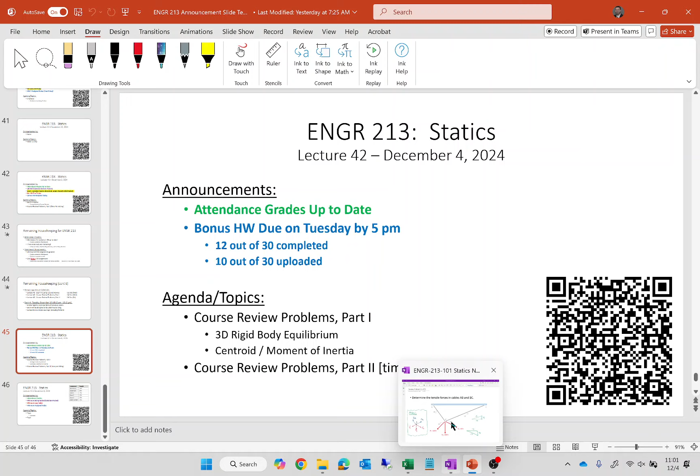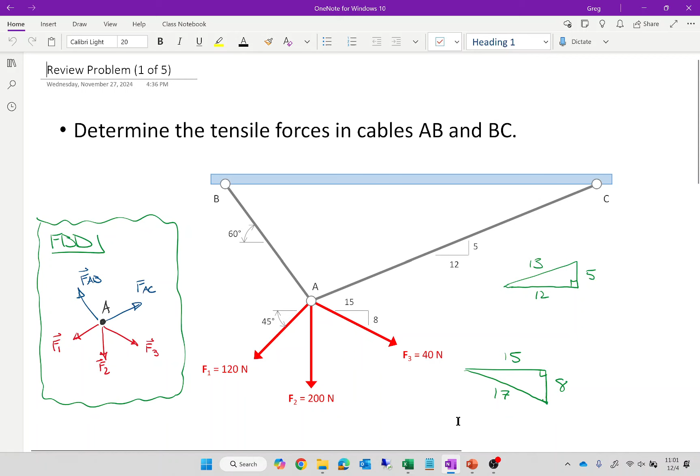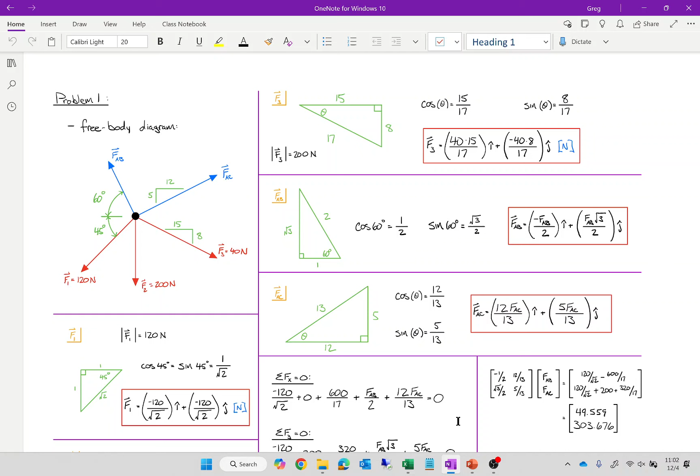So the one other thing I wanted to mention is that this example that we did last time, if you check the class notebook, I did upload the solution because, again, my computer was being a little weird last time, so I just uploaded that here. I won't go too far into that, but everything that we put on the board last time is available there. Okay. Everybody ready to get to it? Let's get to it.

So this is problem number 2. I've got 2 problems in this review that I just had a lot of fun putting together. This is one of them. So I have a 100 kilogram plate that is being subjected to a 300 Newton force right here and a 200 Newton meter edge moment applied on this far edge over here. And I would basically like to get the reactions. So I've got a reaction here, I've got 3 reactions here, and a tensile force in this cable.

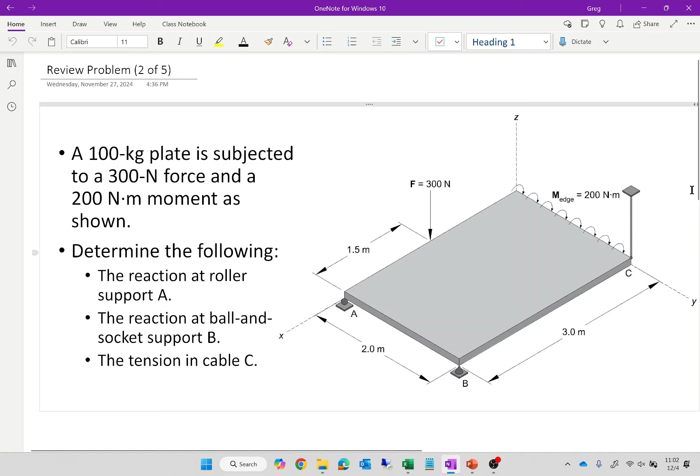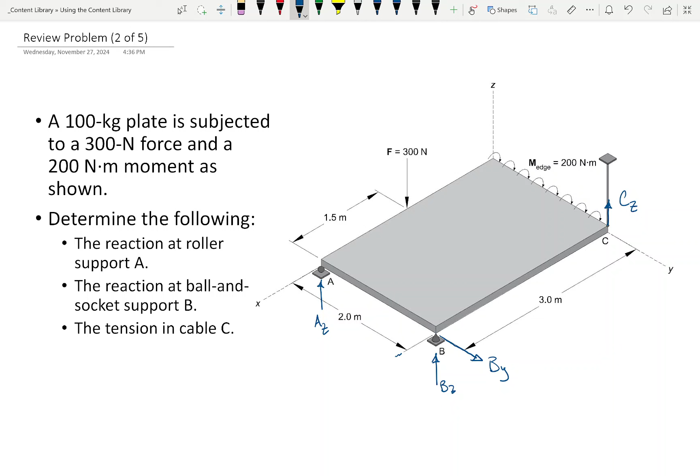Okay, so we talked about that part last time. Let's draw that out. Okay, so I'm going to have some tensile force here, which I'm going to call CZ. I'm calling it CZ because it's along the Z-axis. I'm going to have some reaction here, which I'll call AZ, and I'm going to have potentially 3 reactions here. I can do better than that. I'm going to scroll up a bit, make that a little easier. And I'm going to have a reaction right there, BX, BY, BZ.

As for the directions of these reactions, notice that BX is along the x-axis, BY along the y, BZ along the z. I put them along the positive direction for each of these axes, okay? So I'm assuming that they're along the positive direction. So if BX were to be negative, it would just be going the other way, okay?

Now, there are 3 reactions, A, B, and C. There are an additional 2 forces being applied to the system. So the 2 forces are F, the 300 Newton force, but what's the other force being applied to the system? And I'm not talking about this edge moment because that's not a force, that's a moment. What's the other force being applied to this system? The weight, exactly right. So the weight is going to be, I don't know, right there. Right?

And how much force is that, by the way? That's a trick question because the answer is not 100. It is 100 times 9.81, right? Because that gives me 981 newtons. Does that sound good?

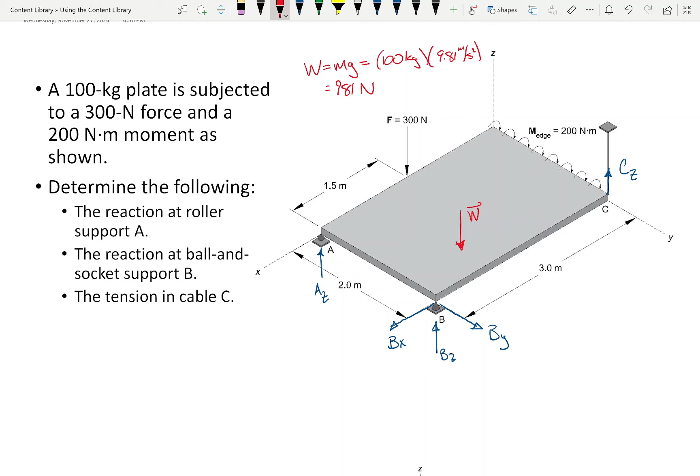Now, I am not saying that we are going to ignore this edge moment. Far from it. But it is not a force. It's a moment. Okay? So, I would like to list, let me do this.

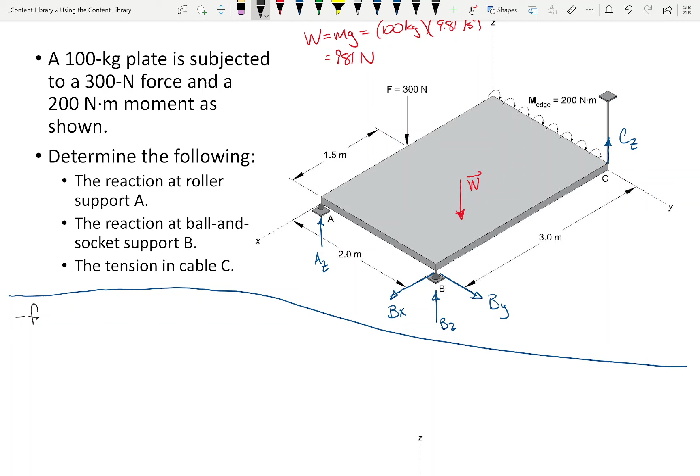Let's list all our force vectors. And by the way, I put a copy of the system down here. I'm going to drag that down a bit. Let's list all our force vectors, right? So we have force vector A, which is AZ times K.

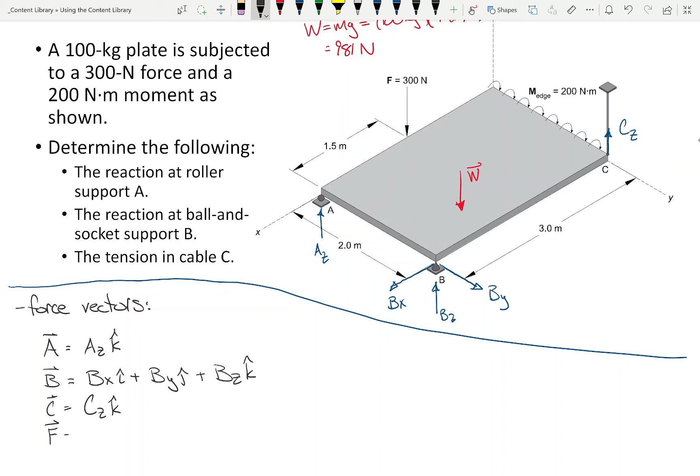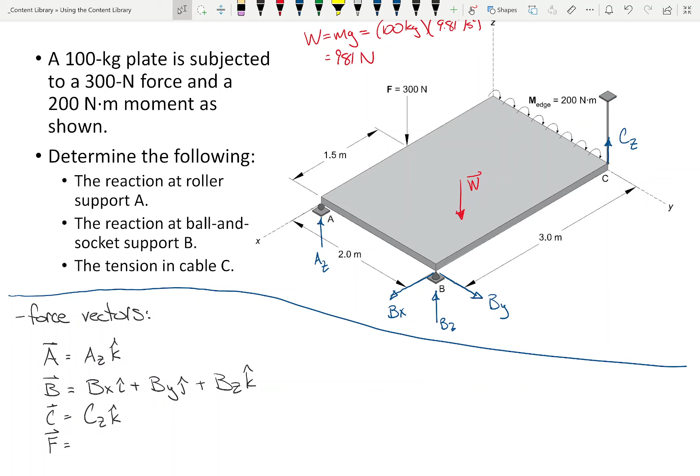Force vector B, force vector C, which is right here. What about force vector F? How are you going to describe force vector F? Somebody tell me, how are we going to describe that in IJK notation? Negative 300K. It's K because it's along the Z-axis, and it's negative because it's going down. 100% right.

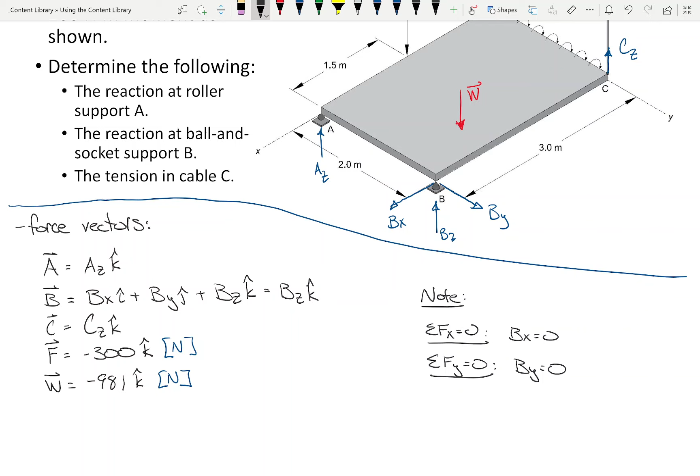So note, so I'm going to say that's all we got to deal with, okay? And I'll just say note, would you like me to give you a two-dimensional analogy to what I just did? Let me give you a two-dimensional analogy. Here, I'll put it right here.

Let's say I have a beam with like a point load and a distributed load. How many reactions are here at the roller? How many reactions are here at the pin support? A vertical and a horizontal, right? But what is the horizontal reaction for this problem? Because there's nothing horizontal, right? That's the same thing that happened here, just in 3 dimensions. There were no applied forces in the x direction, no applied forces in the y direction.

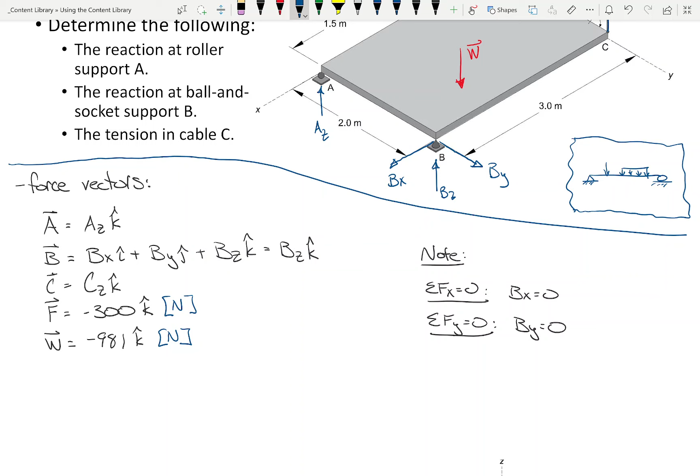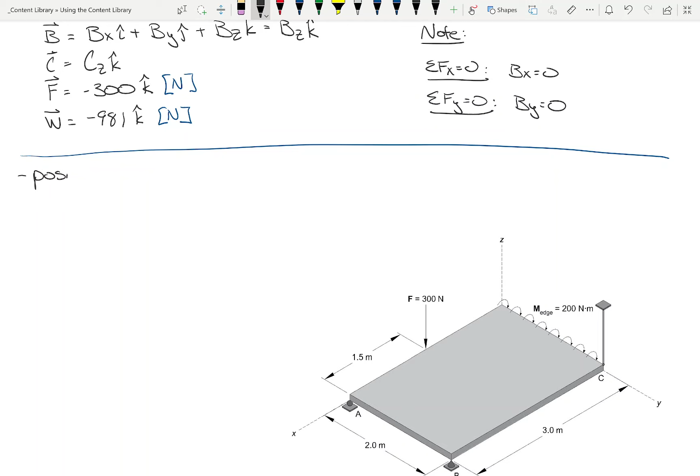So yeah, there are forces there. I'm just showing that that force has a magnitude of 0. Does that make sense? Everybody okay with that? Okay. I just wanted that to be said, okay? We're still going to sum moments about B, okay? So, okay. So now what I want to do is I want to look at position vectors and I want to look at moments.

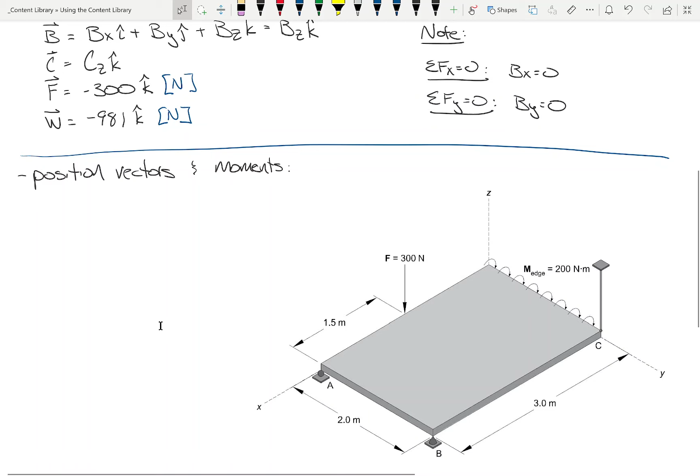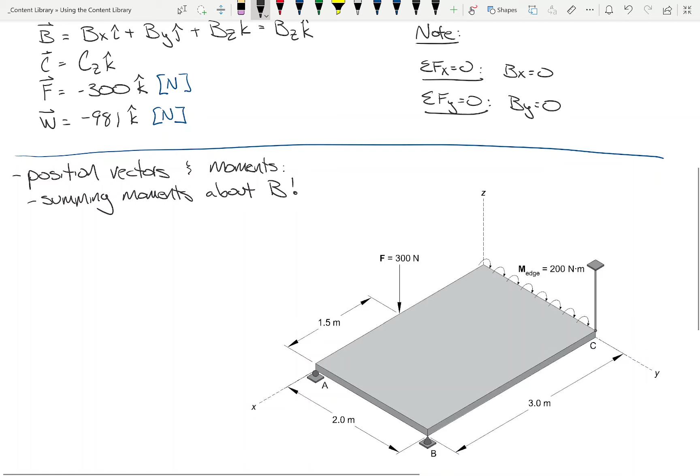Okay? So this is our problem, and we're going to sum moments about point B, just like we said we were. Okay, so we're summing moments about point B. So let's deal with each of the forces. So let's start off with A. So vector A is going to look like that, right?

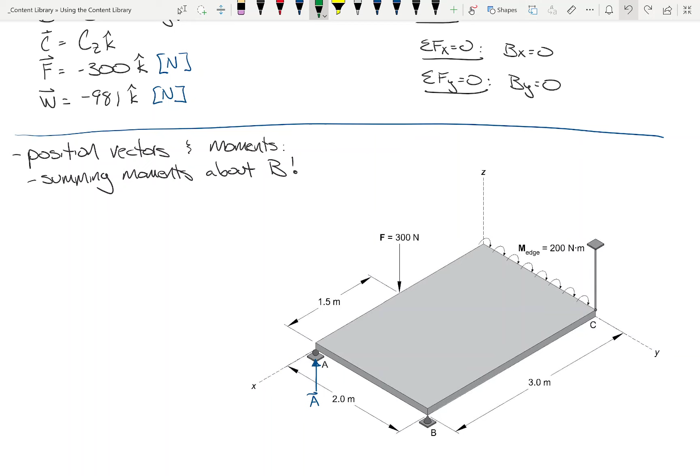So if I'm drawing my R vector, how do we do R vectors? R goes from the point of interest to the line of action of the force. So the R vector for this one essentially is that, right? Oh, let me use a different color. That's the R vector, right? Just from here to here. And so we'll call this R vector to A from B, right? So help me out.

What is R to A from B? How do we get to A from B? How do we do that? 2 meters in the y direction. Is it positive or negative? Negative. Because this is positive y. So the R vector is negative 2j, right? Does that make sense? To get from here to here, we don't go any in the x, any in the z, we just go y, and it's minus 2j.

Okay? Sound good? And the reason that we're doing that, I'll put this here on the board, is because we're going to need to do a cross product like that to get the moment, right? Make sense? Okay?

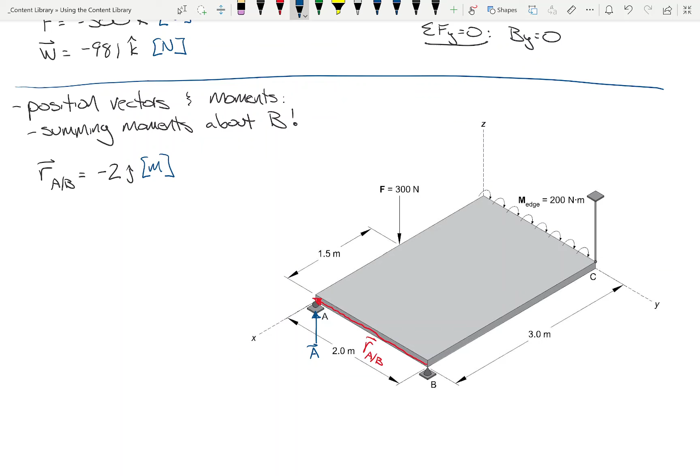Now, there is a force right here, right? But do we need to write an R vector for it? No, because we're summing moments about that point. So what we would essentially be saying is that the moment from that reaction is going to equal that reaction, but it's going to be crossed with 0, right? And a vector crossed with 0 isn't going to be anything, right? Does that make sense? So we're not going to have to worry about that.

So what about C? Okay, so we've got a C like that, and so the R vector is like that. So R to C from B. What is R to C from point B? How am I going to describe this vector? Negative 3I, right? Because it's negative 3 along the x-axis.

Okay, and we're doing that because we're going to have to do that. So basically what I'm doing here is I'm writing a list of all the moments that we're going to have to compute. Okay? Does that make sense? All right. Am I going to need any more R vectors? How many more am I going to need? 2. Because I'm going to need an R vector here.

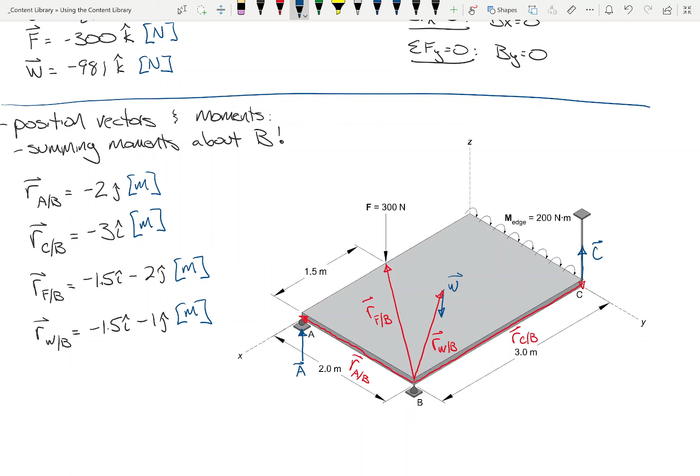So, and again, what we're going to have is MF, MW. Okay. Does that make sense? So, all right, here's my point. Okay, so there's the R vectors. Let's see if we can write down our moments. So let me write down what I've got here on the board so far. And I'm going to skip the B.

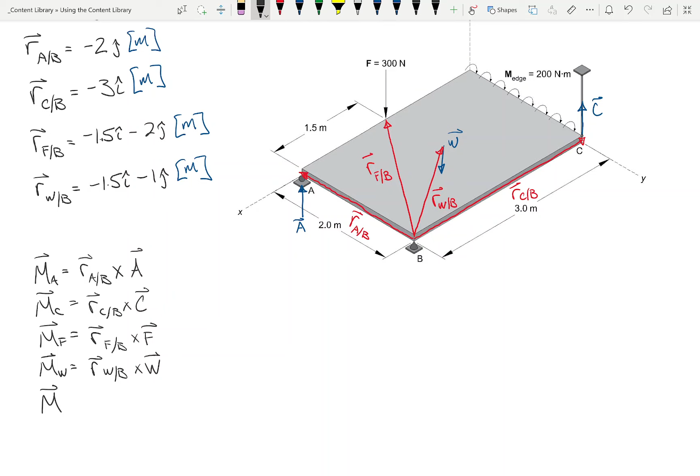Okay, so I have 4 cross products that I'm going to need to compute, okay? But are there 4 moments? There's 5. When I sum moments, I have to sum 5 moments. Which moment am I forgetting? The edge moment. So what that means is I need to describe this moment as a vector, right? How do I do that? Okay. Okay. And the answer is

the right-hand rule. Do y'all remember the right-hand rule? So what happens? Your thumb goes along the axis of rotation, right? And your fingers curl in the direction of positive moment, right?

So, oh goodness. Oh, you go away. Don't laugh. So, I said don't laugh. I'm kidding.

All right, so my thumb is going along the y-axis. Why is it going along the y-axis? Because the moments are rotating about the y-axis, right? Now, if my thumb goes in the y-axis, are these moments rotating in the direction of my fingers or opposite my fingers? Opposite. So I would then say that this moment can be treated as minus 200J.

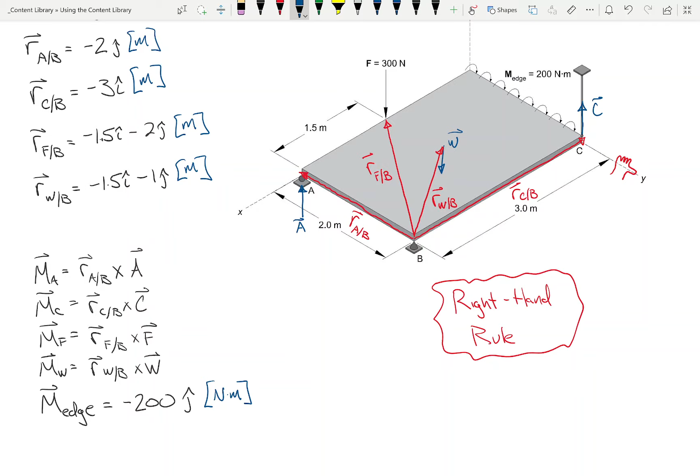One of the other things that I'm hoping is clear is, well, I'm getting ahead of myself. I'll talk about that later. Okay. All right. Let's start doing some cross products, okay? So let's start doing these.

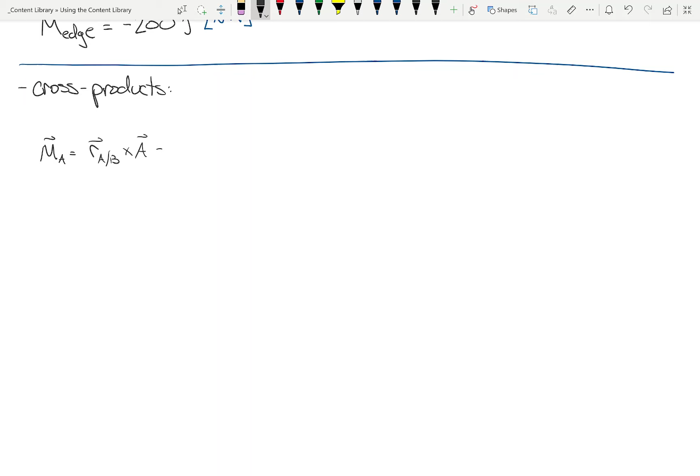What was this first one, by the way? What was RAB? Negative 2J. So this is going to be, and then this one is just that, right? Okay. So let's see. Let's see if we can reason our way through this. So if we do cofactor expansion, we're going to have an I term times what? Because it's going to be like this minus 0, right?

Okay. What about the J term? What's the J term going to be? 0 and 0, right? What about the K term? 0 and 0. So that's it, right? That's the cross product right there. Just minus 2AZ I. Is that okay? Did I do that too fast? Okay. Let's try MC.

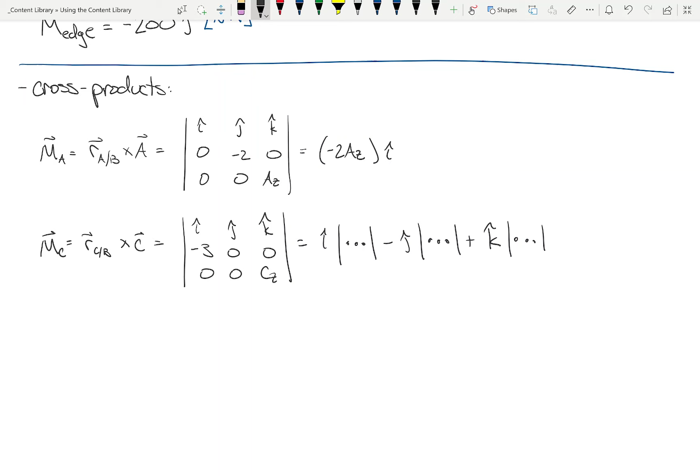But remember, how does the cross product work? We have I times a determinant minus J times a determinant plus K times a determinant. This and this go to 0, right? So we're going to have minus J times minus 3CZ, so this is going to be plus 3CZJ.

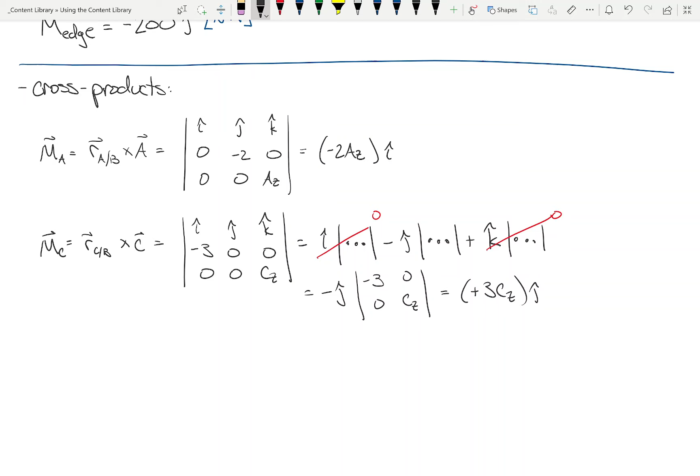Is everybody okay with that, like the signs? I would say that's the hardest part. Again, I mentioned, don't skip steps if you're feeling unsure. This is one of those things where the problem's easy, but getting the pluses and minuses, you don't want that to trip you up on the exam.

MF. Okay, so now we're actually going to start having some numbers, because this is IJK. So let's start off with the I term. Knock out the row and column here. We get negative 600. Or wait, no, positive 600. Wait, did I get my signs? Oh, no, I forgot a negative here. 600I.

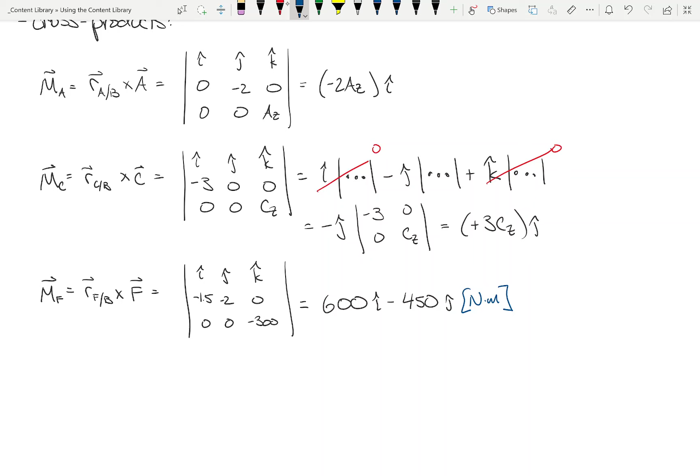Let's see if we can do this J term. We got a lot of negatives here. So first let's just do the multiplication. Cross out J, we get 450, but the whole J term itself is negative, so it's minus 450J. And then for the W, negative 1.5 minus 1.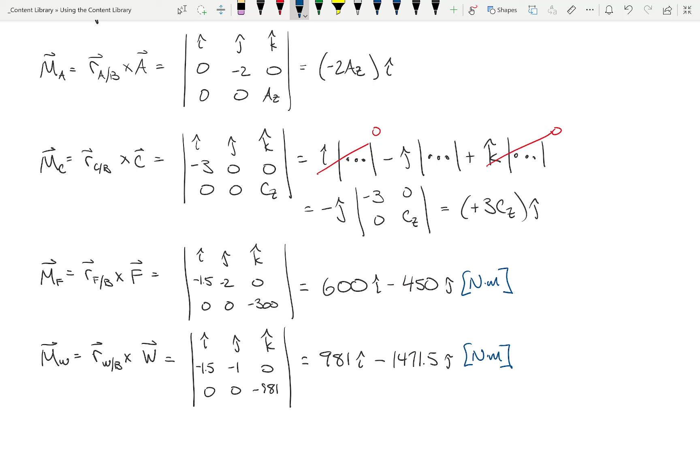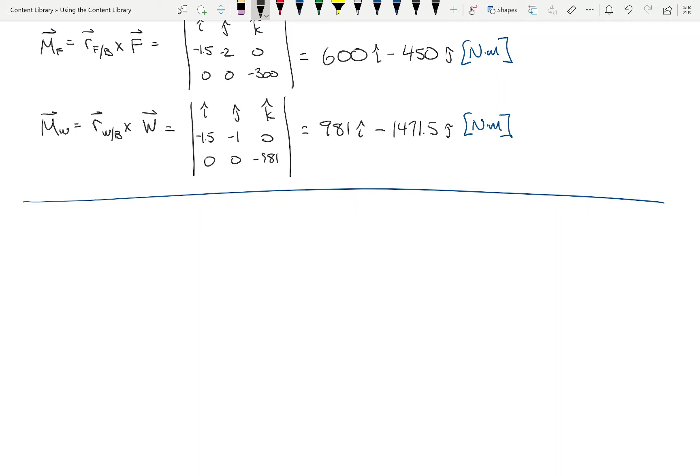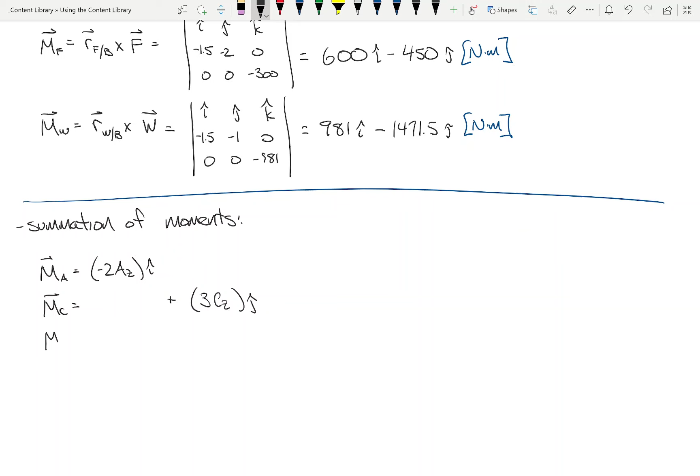So now, whenever we do one of these problems, we want to sum moments first. So let's sum moments and see what we get. We've got MA, MC, MF, MW. And did I forget one? The edge moment, right? There we go.

We can handle each one independently, because we can sum this column to get AZ, and sum this column to get CZ. I'm going to do this column first. Summing moments about the x-axis, move the 2 onto the other side, get 2AZ equals 600 plus 981, 1581. AZ is that over 2, 790.5 newtons.

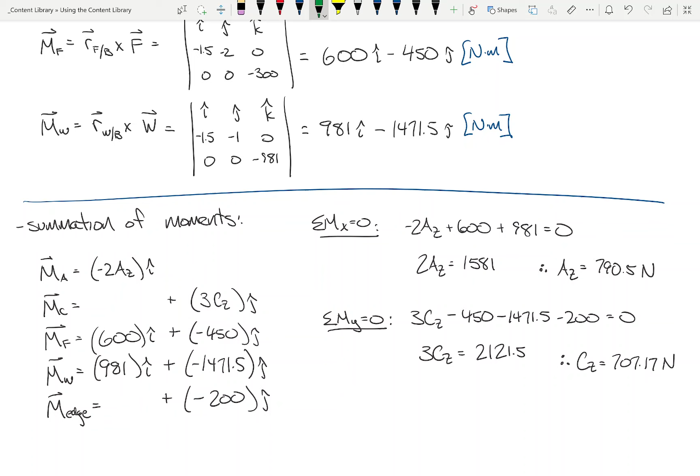So what's left to solve for? BZ, right? Because BX is 0 and BY is 0. So we sum the forces, basically just in the z direction, because we already did the x and y at the very beginning. We've got AZ plus BZ plus CZ minus 300 minus 981 equals 0, because there were only 5 forces on the whole problem.

And we now know what AZ and CZ are. So BZ is just that, sum that up, and we get that BZ actually is negative. And there's our answers.

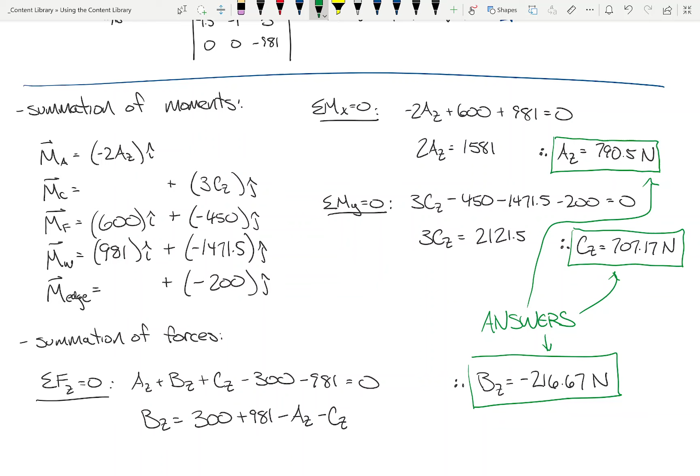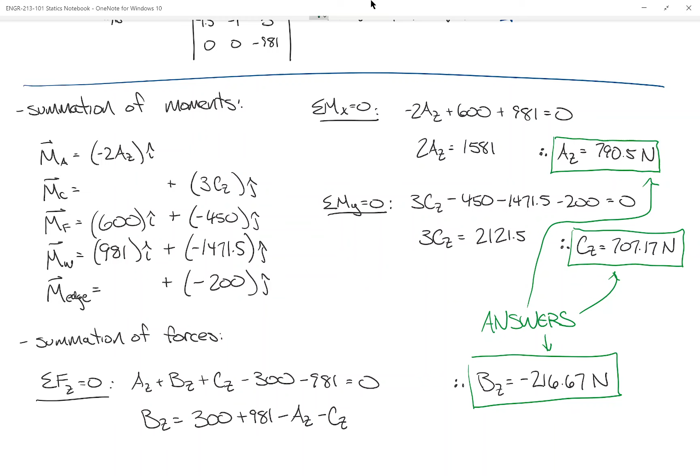That was a long problem, but was that a good problem? Good review, right? It's been a while since we've done stuff like that. Does anybody have any questions on this? Everybody good? Are we ready to go to the next problem? Where's my...

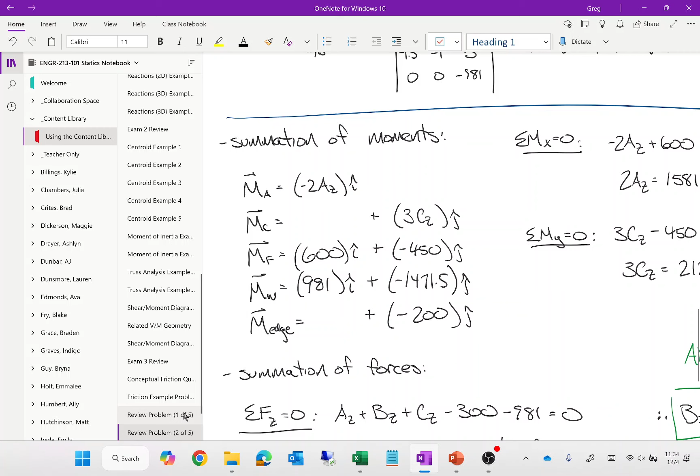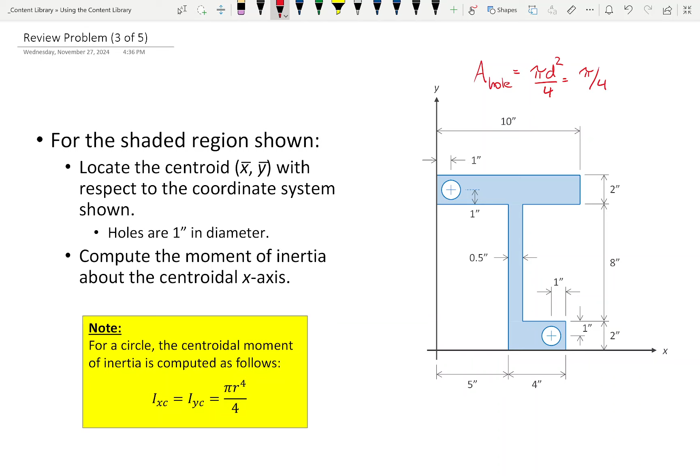The area of a hole then is going to be pi over 4. Is that okay? Everybody okay with that? All right. So I think I have a little typo in my hand calc, so we'll just sort of play that by ear. Okay.

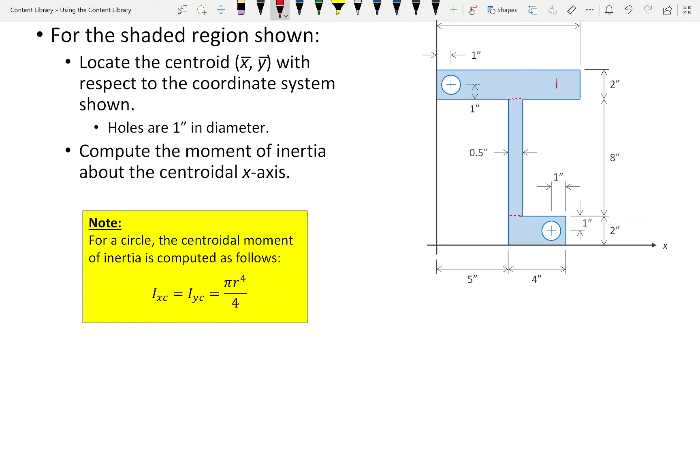All right. So what I'm going to do for my shape discretization is I'm just going to split it up like this. So I'm just going to say this and this. I'm just going to slice it like that. So we're going to call this shape 1. I can do better than that. I'm going to call this shape 2 and shape 3. We'll call that hole 4. Call that hole 5. Okay?

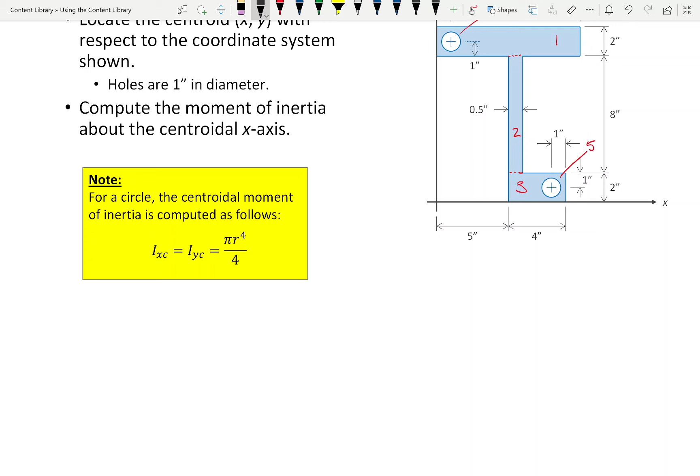Does that make sense? And I think I'm probably going to call an audible and not do the moment of inertia calculation in here. I might put that in the notebook, because I think the centroid calculation is far more important. Okay. All right. So we're going to calculate the coordinates of the centroid both along the x and y axis. And let me see if I can do that. Let's see if I can do it like this.

Okay. So we're going to do a sum here. So the first thing we're going to do is list the areas. Okay. So what's the area of shape 1? 20. What's the area of shape 2? 8 times 0.5, and this is 8, right? So 4 and 8.

Now what about each of the holes? Each of the holes are pi over 4, right? Pi d squared over 4. So I'm just going to write those as negative pi over 4. So the total area then is going to be 32 minus pi over 2. Is that fair? Is that fair? Okay. Let's do the x-axis. Then we'll do the y.

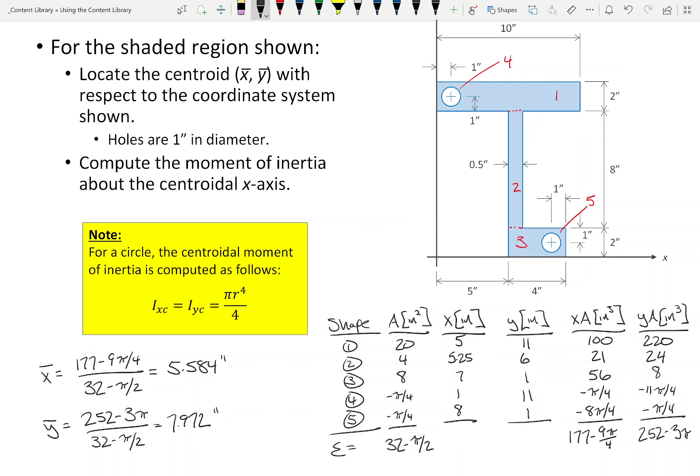Yeah. 5.584. Do I have a second? Okay. All right. What about Y bar? 6.010. Do I have a second? I had a typo on mine, so I don't have this answer. So you're getting somebody shaking their head. What'd you get? I got 7.97. 7.9. 7.2 actually. 7.972. Did you? Okay. Okay.

Okay, let's take a step back. Let's see, did this make sense? I would say the biggest thing to make sure that you're comfortable with are these two columns right here, X and Y. Those were singularly the biggest source of mistakes on the exam. All of the distances need to be measured from this point, because what is this? These are the coordinates of the centroid from here, right? That's the whole point. So I said point a lot the last couple sentences. All right, make sense? Any questions? Because I want to show you a couple things before we get back on Friday, okay?

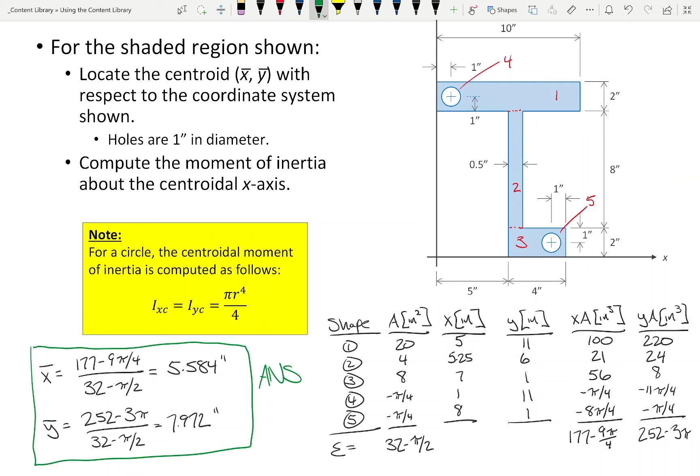Okay, let me show you a couple things about the next two problems. I thought it prudent to have a truss. So we're going to do this truss together, okay? I'm going to tell you with this truss that one of the members in this truss is going to have a very interesting answer. And it is this member right here. We'll get to that next time. Unless you want to go ahead and try it on your own, I'm not going to stop you. But if you try this on your own, you're going to get something unique on this member, member AB.